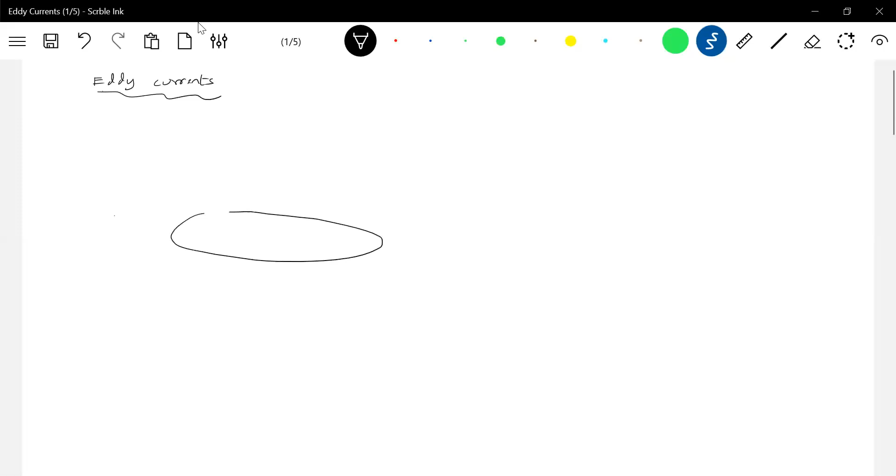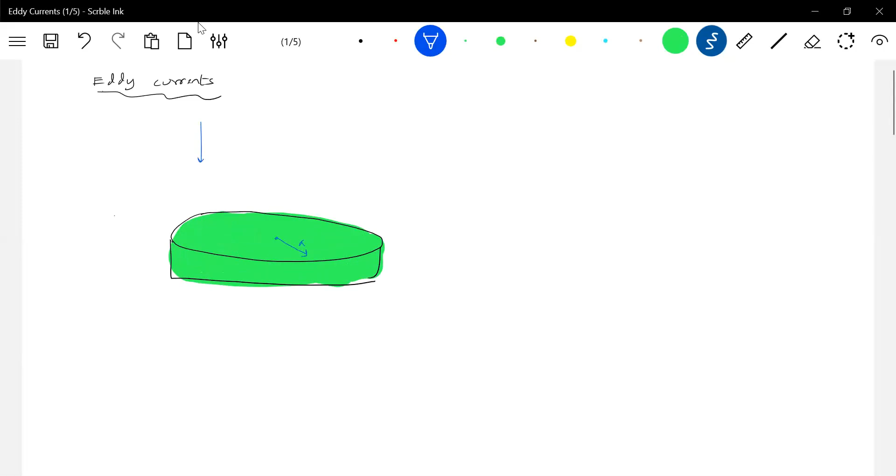So let there be a conducting ring, a conducting solid disk having radius r. Here I'll make B bar directed into the plane of this conducting disk. Let this B bar vary with time. This is an iron disk, let me call it. Now, what conditions will arise here?

Can you remember the previous problem? I asked you about the power dissipation, and there I asked you to neglect eddy current, but here you have to take eddy currents into account. What is basically a conductor? It contains electrons, free electrons, and the free electrons can move randomly in any direction.

And what about ions? Ions are immobile in a conductor. They'll be bound by bonds, and due to adjacent bonds, the ions will not at all move, but they can vibrate about their mean position. But electrons, they can move randomly. Now there's a magnetic field there.

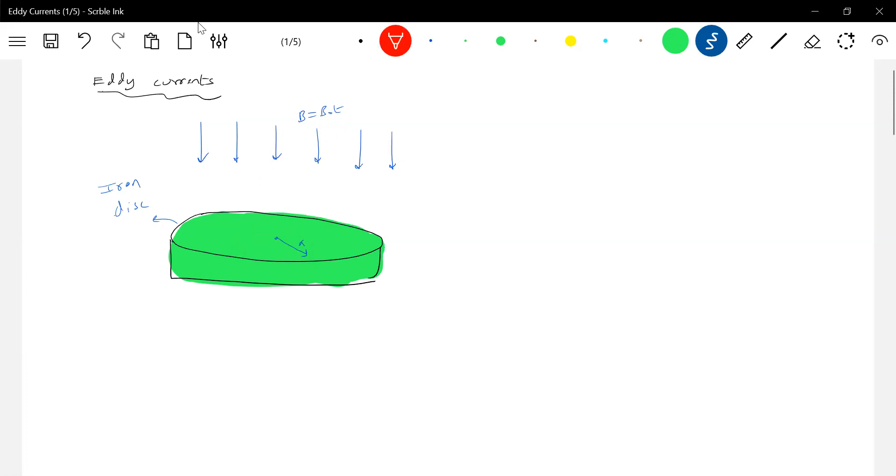The electrons which are moving randomly will experience this magnetic field, that too a time varying magnetic field. Due to this time varying magnetic field, the electrons will encounter an induced electric field. Due to that induced electric field, the electrons start moving. Now how do the electrons move? Will they have an ordered motion? The answer is no. What we notice is that these electrons will try to complete a closed path.

In this way, what happens is the free electrons which are present will complete a loop like this. They'll move in this direction, meaning the electron will be moving like this.

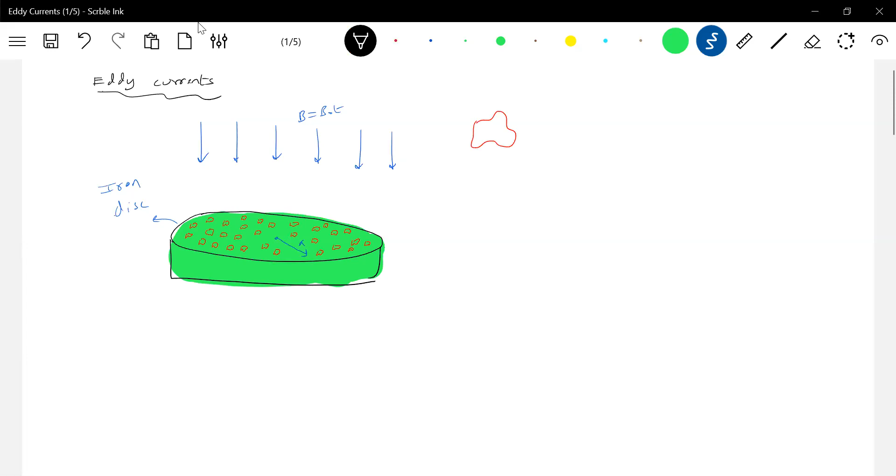Why am I putting this? This is the path of the electron. Okay, I had to show it opposite, no? The induced current will be path of free electron. Path of free electrons in the disk.

So why do they move like this? Because it will not be like in a circular ring, they don't flow in one specific path here, it's very random. Like this, an individual electron will try to move in a circular path. What makes it move like this? The induced electric field. We know if the magnetic field varies, there will be an induced electric field produced.

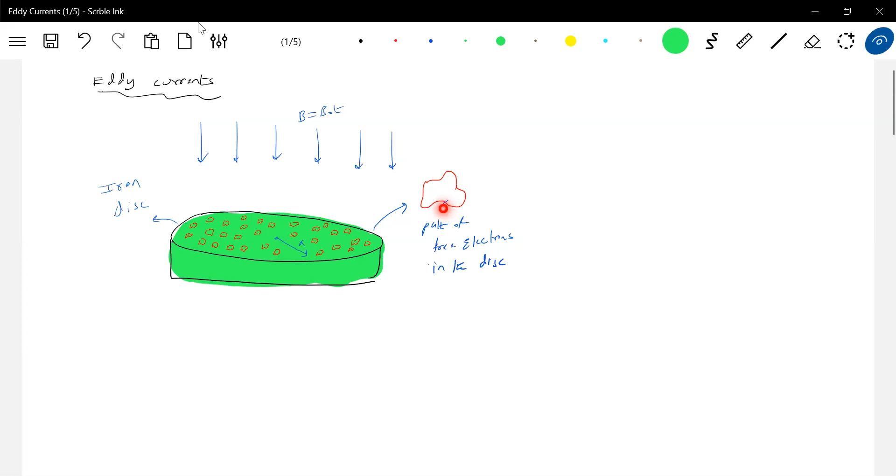Due to that induced electric field, these electrons will experience force. E bar - this is the path of free electrons, and the current will be in this direction. Let me just put only this much. What is this arrow? The arrow indicates the path of free electrons in the disk.

Why do I do this? Because you go back and account for Lenz's law - the flux is negative, negative flux increases, d phi by dt is negative, EMF induced is positive. So the induced current should flow counterclockwise, opposite to the direction of induced current there should be electron flow. So what I'm showing is the path of free electrons. These are called eddy currents.

It's very difficult to predict any equations for this. Now, whenever an electron moves in some path, what will happen? It will encounter collisions with the ions, and thereby heat will be generated. They'll be drifting in this random path, better to say - rather than movement, these electrons will be drifting in this random circular path.

Like that, an individual electron will try to move in this way. There will be millions of electrons, so what you should see now is millions of these closed paths. Will there be any heat generated? Yes, there should be heat generated. If you go and touch this, it will be hot.

The temperature of this will continuously increase. Where has it come from? The work you do to produce a variable magnetic field - that energy is utilized to make these electrons move in a curved path. And due to the flow of electrons inside a conductor in some random path, heat will be generated.

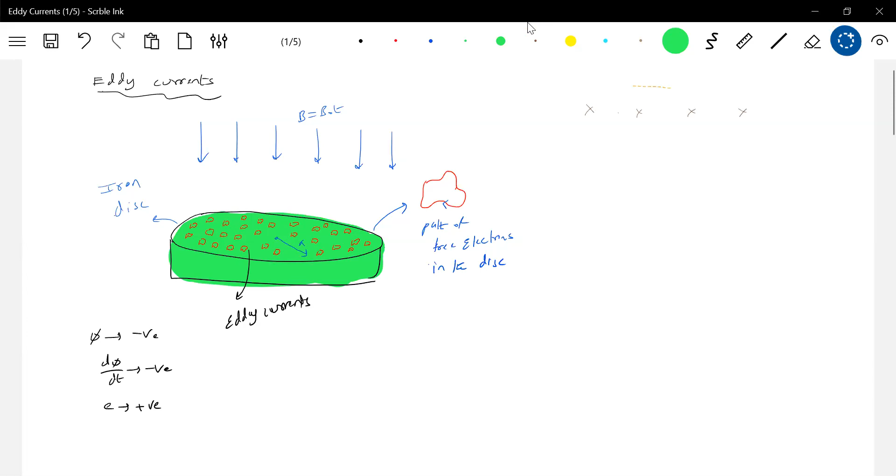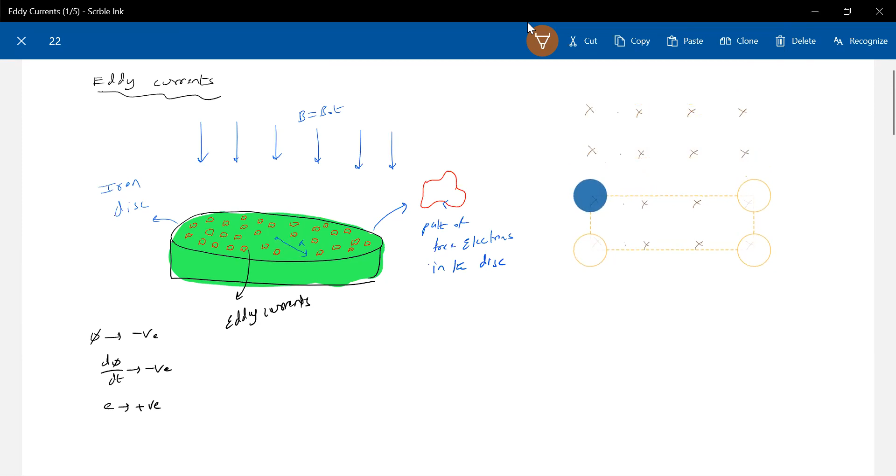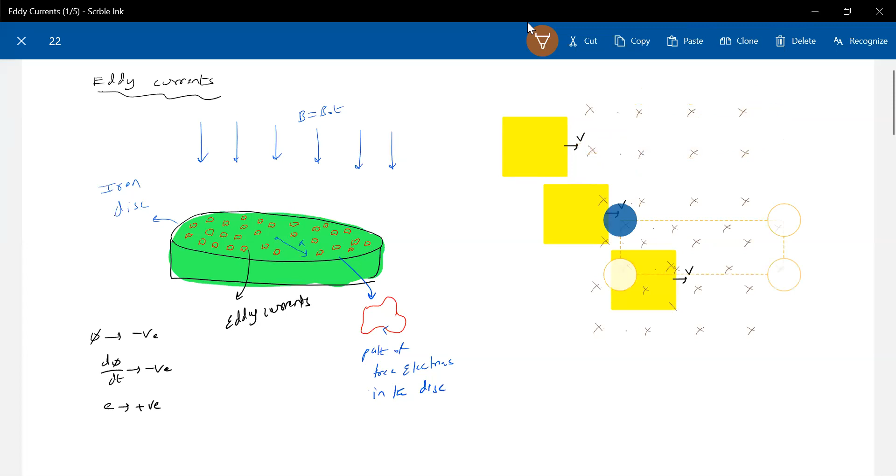If I have a magnetic field, now let me take a plate. There's a plate. I'll start making it move. Now the same plate is going to enter. Now it is entering. I need more dots. This plate now is fully inside.

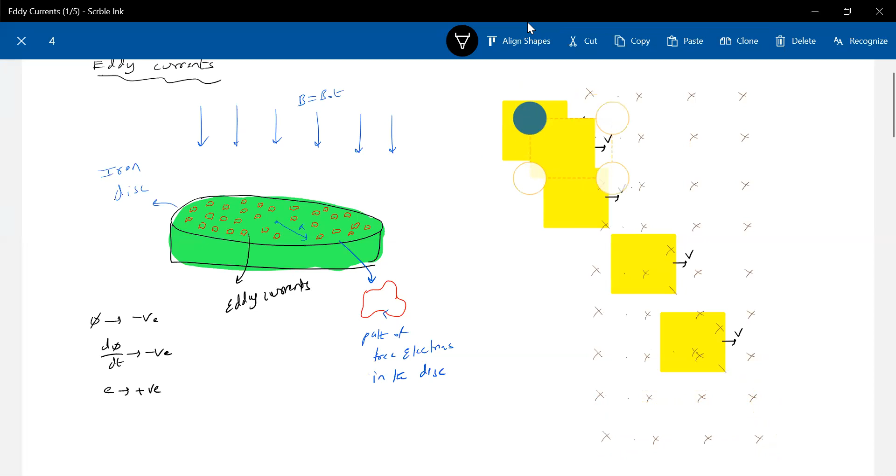Okay, this is the situation I brought. We'll analyze this. What is this yellow color? It's a metallic plate, I'll write it as copper plate. There is a magnetic field present. This plate starts entering into the magnetic field.

Now it is entering. Now let me check if anything will happen to its velocity. Now let's come to Faraday's law. The direction of induced current is such that it should oppose its own cause. Now, in what direction should the induced current flow?

In what direction should that induced current flow here? If it were a loop, we would have answered, but this is some conducting plate, so where is the question of any specific direction? At least let's use Lenz's law.

Flux from the magnetic field linking this is into the plane. So as it enters, the negative flux increases, d phi by dt is negative, EMF induced is positive. So therefore the induced current should be anticlockwise. Where do I show that induced current? Can I draw it here, on the edges? No, an eddy current will flow here, then the eddy current starts flowing. Where? Only in this region.

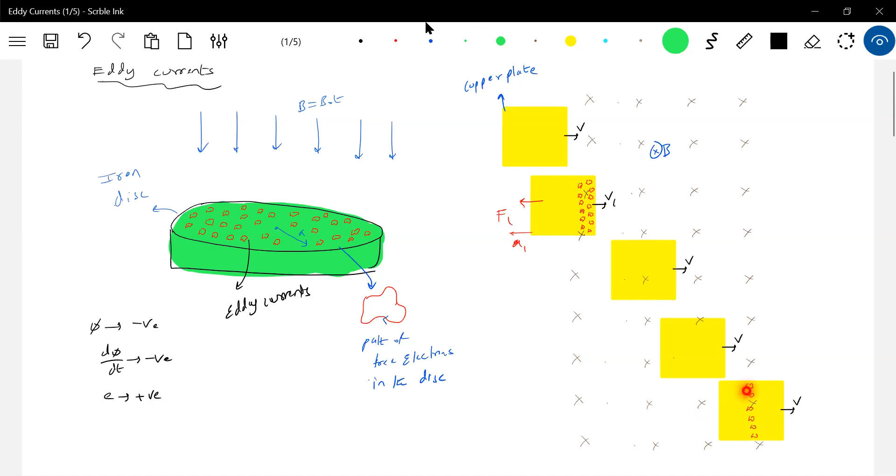Now again, the direction of induced current is such that... finally it has entered into the magnetic field region with a velocity, say V dash. Okay, it will remain V dash. Now again the velocity will change, again decrease. So the direction of induced current is such that it should oppose the cause - again retardation. Finally, this plate will move through the magnetic field with a constant velocity.

Now here is where eddy current will come - you have to know you should not show eddy current here, but where the flux linking varies. The moment the plate point starts moving out, there was flux, now the flux has become zero. So suddenly there will be an induced current by Lenz's law, and an eddy current will flow. So you should not show current here in this way - this will be wrong.

Able to make it out? This eddy current, they'll exert a force. Can we calculate this? Not possible. Of course, we have equations, but at our level, not possible to predict anything like a force. They may make a problem: the eddy current will exert a force of say 10 Newton. If you increase speed, then this force will increase.

The eddy currents will come only when there's a time varying field, not like something else. Only a time varying field will produce electric field, will produce eddy currents. So when a loop enters a magnetic field or when it's leaving the magnetic field, or when a conducting plate is entering or leaving the magnetic field, eddy currents will come.

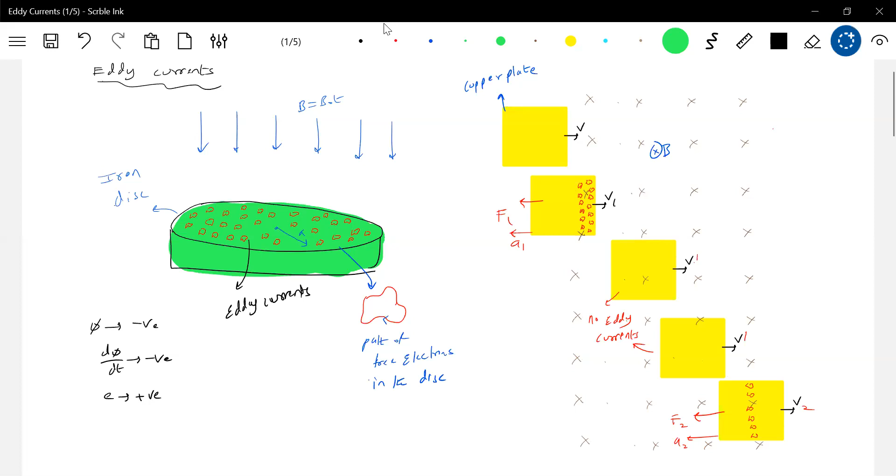Where are eddy currents produced? Let's give an explanation. Hope you're getting this. It's a very small theoretical idea, but it's having wide applications. I'll explain the applications also. You'll be surprised what is the use of basic science and the engineering applications, how good they are for society. I'll give examples at the end of this.

Now, eddy currents are generated in the plate when the plate is entering or leaving the magnetic field region. Then in the plate, where will they be? Only at the boundary. Eddy currents are not at all over the plate, only a part of the plate which is at the boundary, only there eddy currents are produced. No eddy currents are present elsewhere.

I'll pull it up. Eddy currents are present in a plate where a part of the plate is, where a region of the plate is at the interface or at the boundary. What is a boundary? This is a boundary, this part is a boundary. Where a region of the plate is at the boundary of the magnetic field - this part is very important.

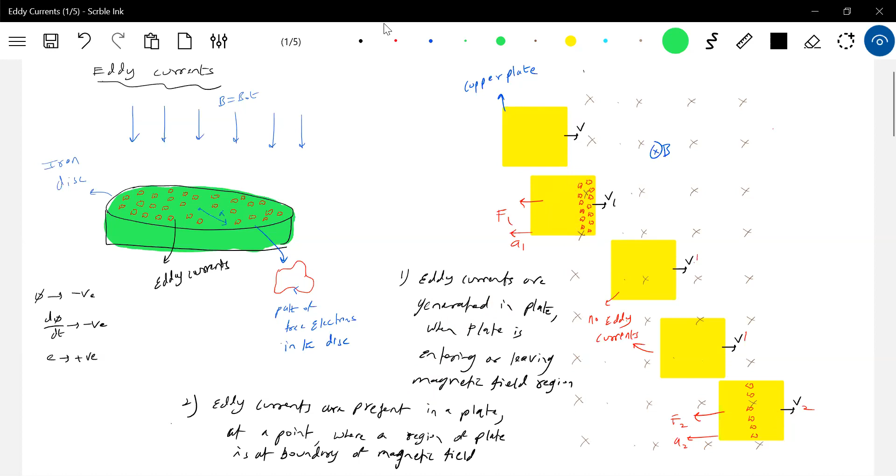In the whole plate, are eddy currents there? No, only a part of the region of the plate which is at the boundary of the magnetic field - there only the eddy currents are produced. I think these are the two very important points which I'm trying to stress here. This eddy current, what do they do? They will retard, that's all. Due to eddy current, the plate will undergo retarding motion. One more last point: due to eddy currents, the plate undergoes retarding motion. These are the three primary things I studied. Anybody having doubt, you can clarify.

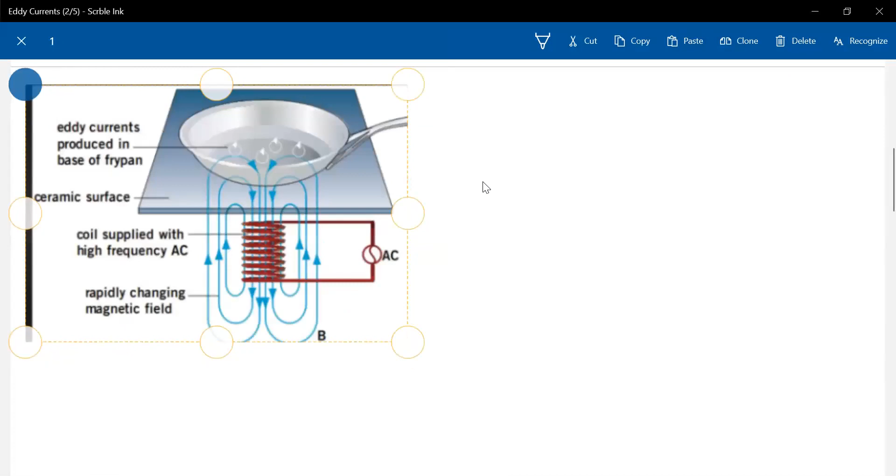Okay, now let's take this one. So when I was studying, I think this was like a dream come true, something like that. Now we have in our home the induction stove. Hope everyone has seen an induction stove - usually it's black color, no? All of you have seen an induction stove? This will be more safe, no? It is like even if you put your arm there... Induction stove - the induction stove is nothing but the application of eddy current.

Nothing big will be there. So what we do is, we have a ceramic surface, this one, and the base of the frying pan. So then what they ask is like an induction cooker - the bottom part is very important. I'll draw the free body diagram, it'll be easy for you. This is the bottom part of the pan. Let's bring all the structures. This is a ceramic layer. Here I'll bring a solenoid.

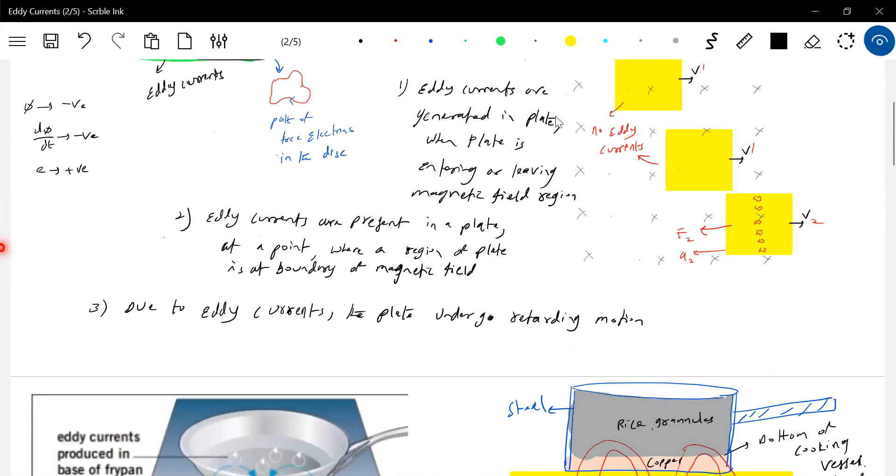How do eddy currents work? Use some brain. There's a bottom, at the bottom what happens there - eddy current will flow. So we are not bothered about how each electron will flow. Is it of any use?

You want to cook rice and you want to eat rice, so will you bother about anything here? Only it should be generated, that's all. At the bottom, eddy currents will flow there, so due to the flow of eddy currents, heat will be generated. Eddy currents - you can't predict the path of each individual electron, that's all, but the eddy currents will flow like this.

I think this is one of the beautiful innovations we can feel from eddy current. To be frank, when I was studying, we didn't have this induction cooker thing.

I think slowly people are accepting it. People think you'll get a shock - why would you get a shock? You tell me, where is the question of shock? Nothing is there. Even if something spills out, nothing will happen. It's ceramic, and it will permit the magnetic lines, that's it. So where is the shock? I think this will be covered inside the cooker, inside that stove, totally covered, and that will take less space.

I think you should do one thing - those who are not aware of this, just watch induction cooker on the internet. So many things are there, and it is more efficient.

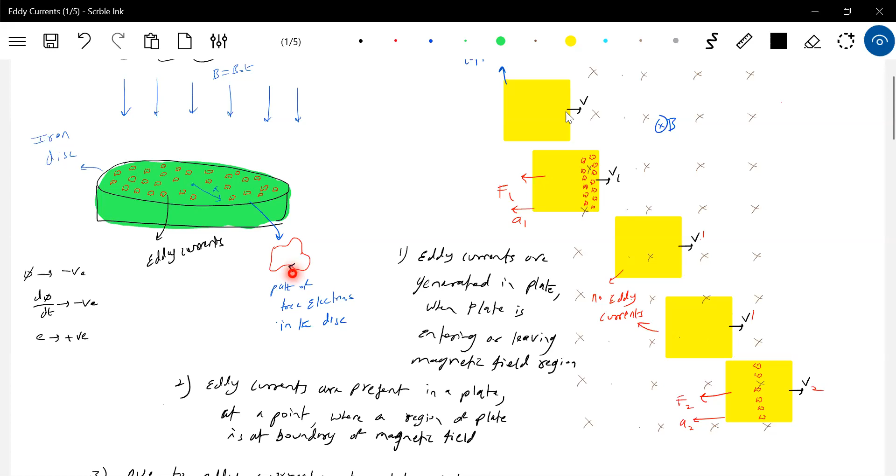But by Lenz's law, the same thing applies here. You mean to say eddy currents are here, not somewhere else or in air. That's why you wanted to show that one. So what is this? It's based on the Lenz law convention. So here, if you want, I can show it here. Okay yes, this one. Understood, yeah.

And now something like this, a conducting disk. I'll give it angular velocity omega naught and release it. What can happen to this angular velocity? This is the axis of rotation. Then a magnetic field is present here. I'll give it angular velocity. Will anything happen to this conducting disk? Can you say anything about what can happen to its angular velocity?

So this magnetic field is there, which will produce a magnetic field. Now look at this one. This part of the structure has no magnetic field. The moment it enters here, it will encounter the magnetic field. So suddenly flux is non-zero, so flux linking that region is varying, so eddy currents will be produced. As flux linkage changes, according to Faraday, EMF will be induced.

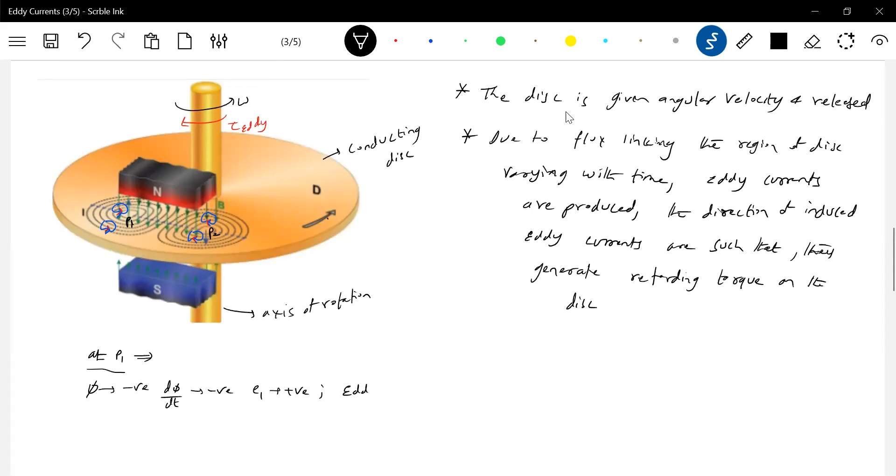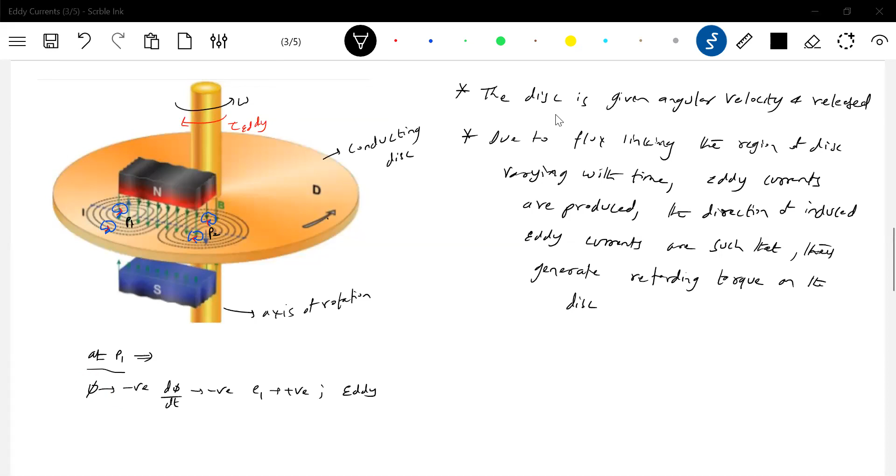At point P1, flux is negative, d phi by dt negative, EMF induced positive. So eddy currents flow... zooming, what all we write. Okay, I think, yeah, now clear. Is it visible?

Okay, I think this is the maximum possible. Now you can see these eddy currents flow in counterclockwise direction.

Now, flux negative at P2, sorry, at P2, flux negative, d phi by dt positive, EMF induced negative. So eddy current flows in clockwise loops.

So they may ask you questions of this kind, you should be very careful. Not a mere diagram, in the diagram they will ask you to analyze and find the direction of induced eddy currents. Again, the same Lenz law. Hope everyone is able to understand how to predict the direction of eddy currents. It should be due to Lenz's law.

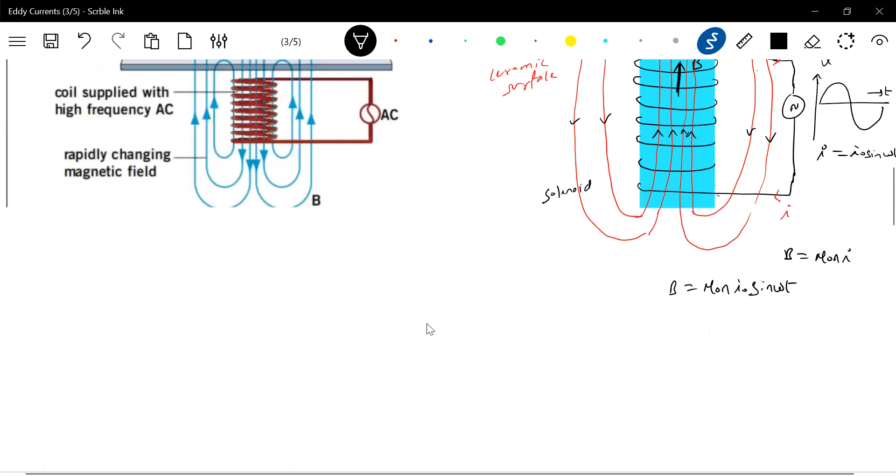Now one more application. You must be ready to predict the direction of induced current, this is very important, the eddy currents direction. Here also, let me go back, I'll show at least one. So what do you expect the direction of eddy current here? Like this, at least one I'll show.

Okay, agreed, this one. No, one more application. Suppose if you send a... let me have water.

In some applications, suppose an induction stove, we need the eddy currents concept. In some applications, the eddy currents are a big headache and they have to be overcome. So how to minimize those effects of eddy current, that we are going to see.

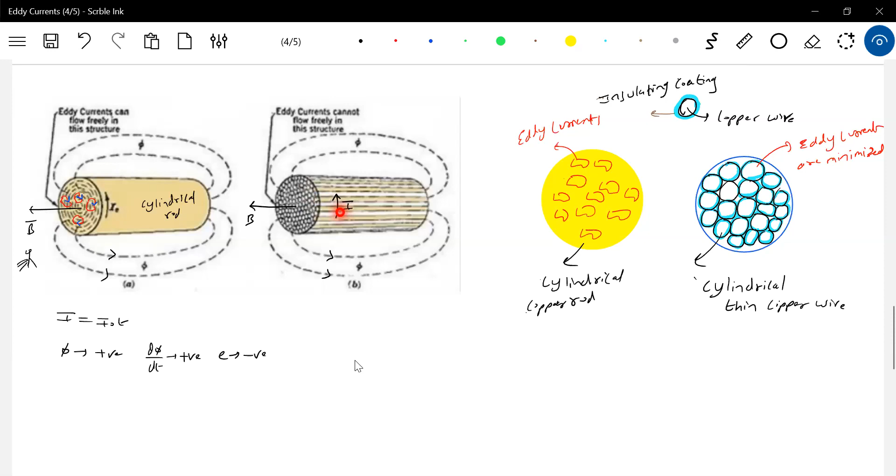No, it can be like this even for a rod. Suppose instead of this, if I have a rod, it is possible, but what is the thickness of wire? Use some common sense, look at the diagram. Thickness of wire is so small that the eddy current, even in this wire, will flow, but that will be minimum.

Not making observation of diagrams. You see, so thin they have shown.

No, it is like this. So here there's a structure where the magnetic field is linking it. The magnetic field is directed in such a way that it will be into the plane. Now, because of this, there will be eddy currents here.

I think now use some common sense. Now, instead of the same structure, if I make it with... I'll stack thin plates one upon the other. Can I bring this? Can I produce this rod of this shape?

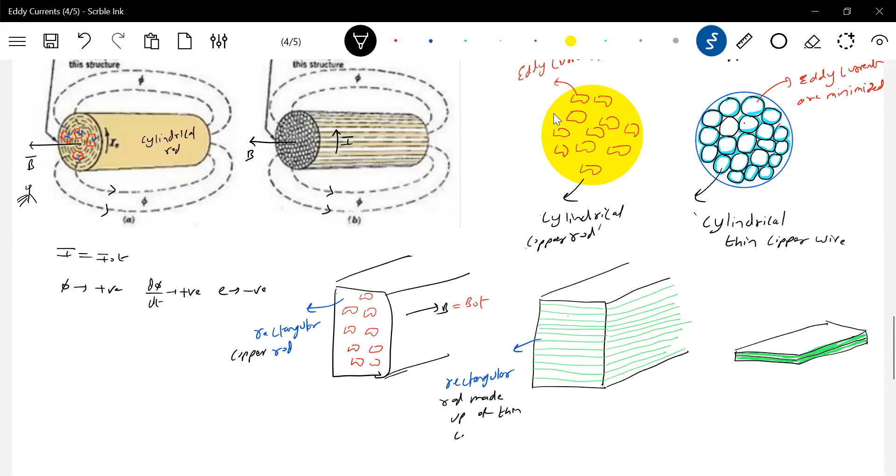Okay, this is what you have to think here: this is the copper rectangular copper rod. What is this? A rectangular rod made up of thin copper sheets. Then there's copper - the green color is an insulator.

So we are not permitting - the eddy currents are not permitted to complete the loop. We are minimizing it, we are minimizing it.

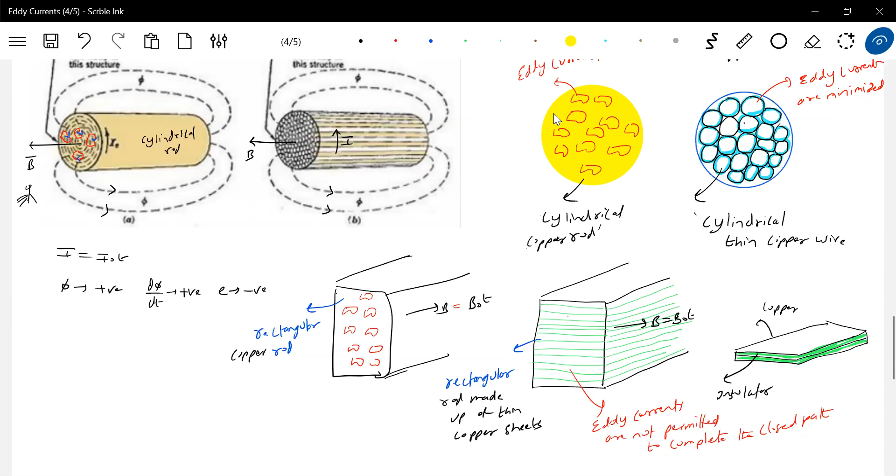So like this, in the applications we need, though the magnetic field is varying, still there's no eddy current - eddy currents are minimized here. Okay, depending upon the application, you can see here. Like this, we have plenty of applications - at some applications, at any cost, I should minimize eddy current. In some applications, I need eddy currents. Please do understand, so these are several methods we have brought.

Okay, let's go for a few more examples. Now, same thing - the plate, there's a uniform magnetic field there, and I want to minimize the...

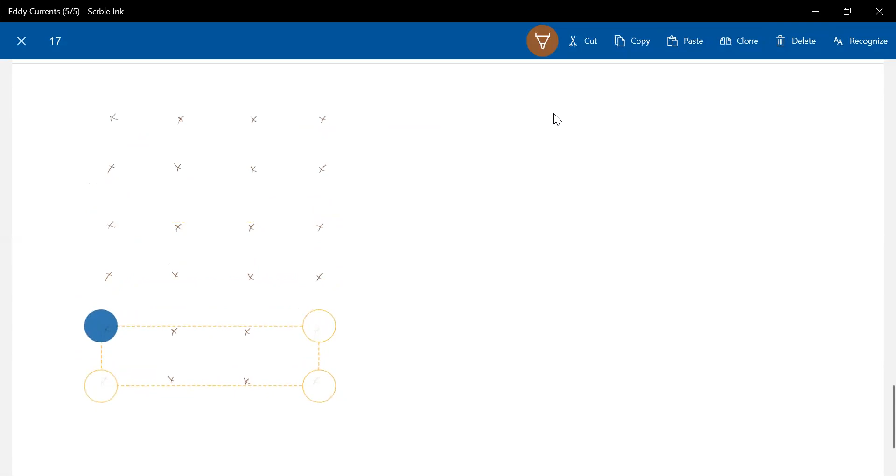No, this is the plate I'm bringing.

Like a comb, all of you know, metal comb, let's assume that one. And there's a uniform magnetic field there, B is uniform, directed into the plane. Now this particular sheet is like an iron sheet.

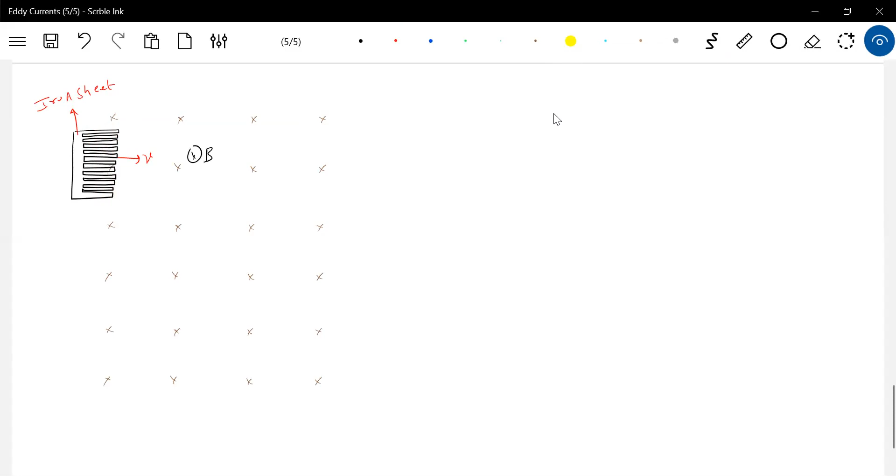I'll slice it up like this. Now I'm going to move it. Okay, now can you... I will just color it so that you can notice that.

You can exactly notice that we have removed some sections of iron there.

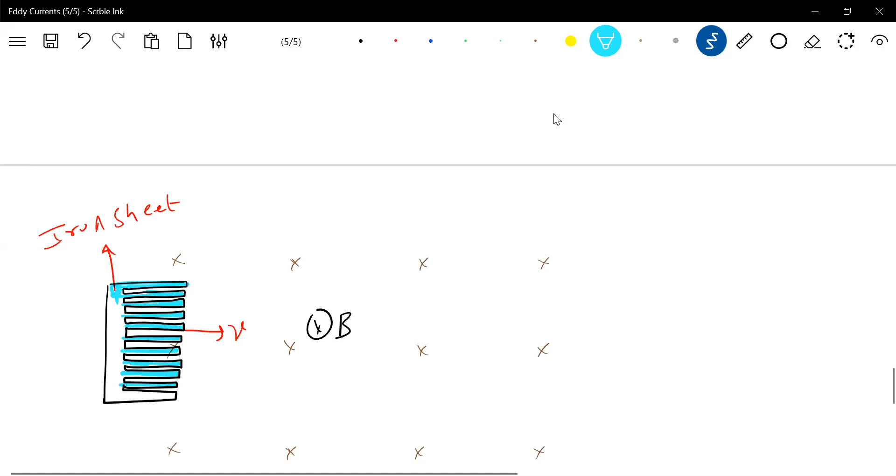Oh no, comb - I think the best thing is a metal comb. Now, what is this? It's like a metal comb. If I move this metal comb in this magnetic field, then we have an iron plate, and the same thing. Let me bring another iron plate. Let's see in both cases, what about the eddy current?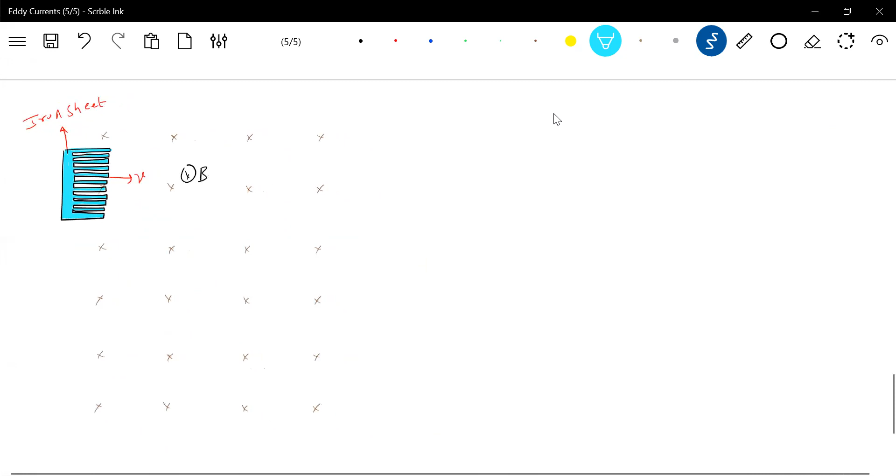Yeah, we have - let's go to our diagram. Now eddy currents will flow, but it'll be less compared to the previous one. So here, the same metal plate, I'll bring it.

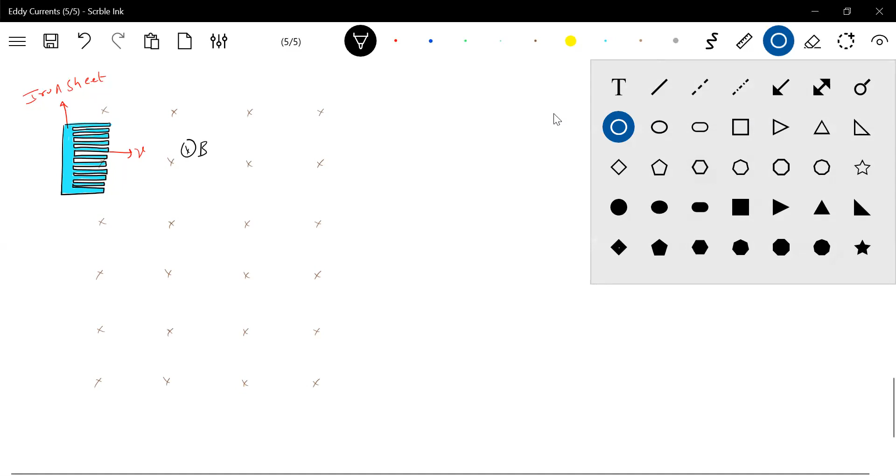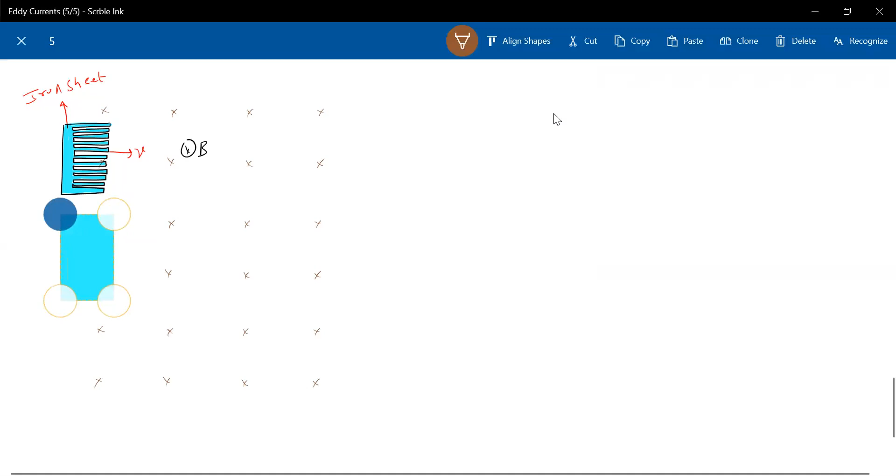I brought a similar metal plate here. There's plate 1 and plate 2, both given velocity. In which case will there be eddy currents? Where will the eddy current be in this region?

Will eddy currents flow in all regions? No, only the region where the magnetic field is at the interface will have it. But there's also an iron sheet here—why are there no eddy currents? Because we are not permitting them to complete the closed path.

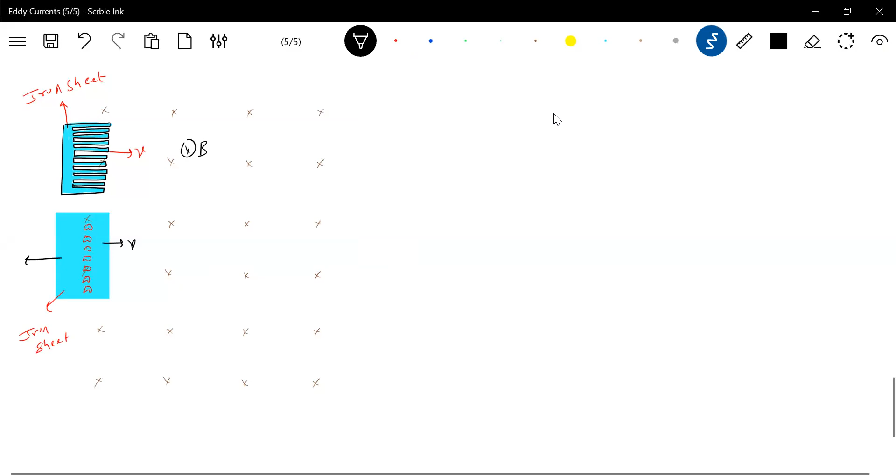Similar to a comb—if you haven't seen one, go home and make the observation. But tell me, in which case will the retarding force be more? Here, no, in the second case the retarding force will be more. Here the retarding force will be less.

F1 will be less than F2. The reason is less eddy current will flow here, while here the eddy current flowing is maximum. Eddy current will flow in this small region but it will be negligible, since we've minimized it by almost 90% by slicing this particular plate.

So in some applications, I should minimize eddy current. I've shown several examples of this. Here too, a plate moving through a magnetic field—where it enters the magnetic field, the eddy current effect should be minimized, so I'll slice it.

Iron sheet 1, iron sheet 2—similarly when it is leaving, the same condition applies. So where eddy currents are needed, I'll try my maximum level to produce them. Where eddy currents are to be minimized, I'll try my maximum level to minimize them.

Hope everyone is able to understand—I think this is a very good, versatile theoretical concept. You won't get numericals, but examples may come involving rotating or translating scenarios.

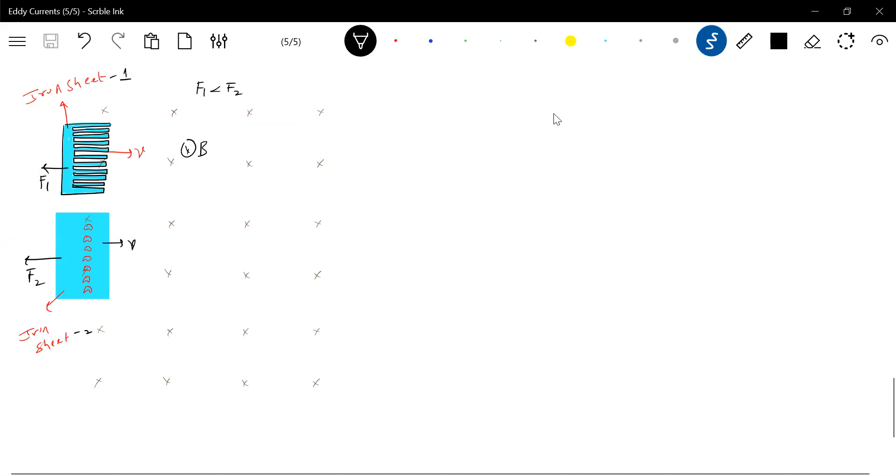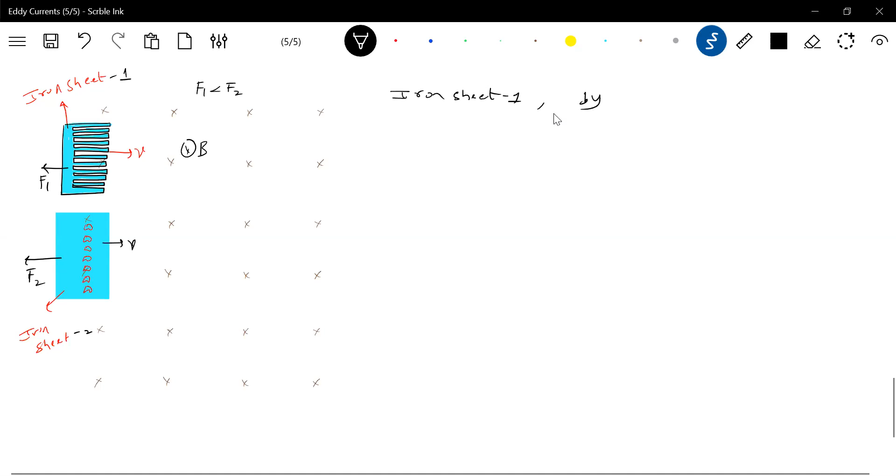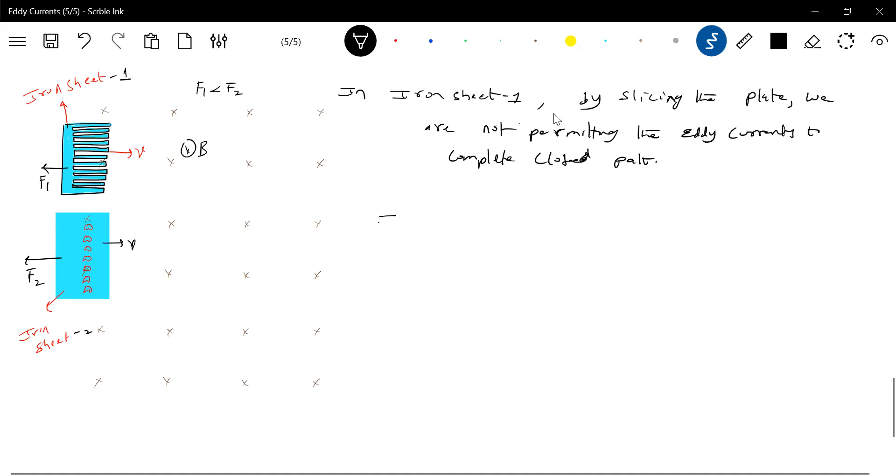So in iron sheet 1, what we do is slice the plate so we are not permitting the eddy currents to complete a closed path. This way, eddy currents are minimized.

Hence, less retarding force where slicing is done. Where eddy currents are free to flow, hence more retarding force. But eddy currents will only flow in the region at the interface, not everywhere.

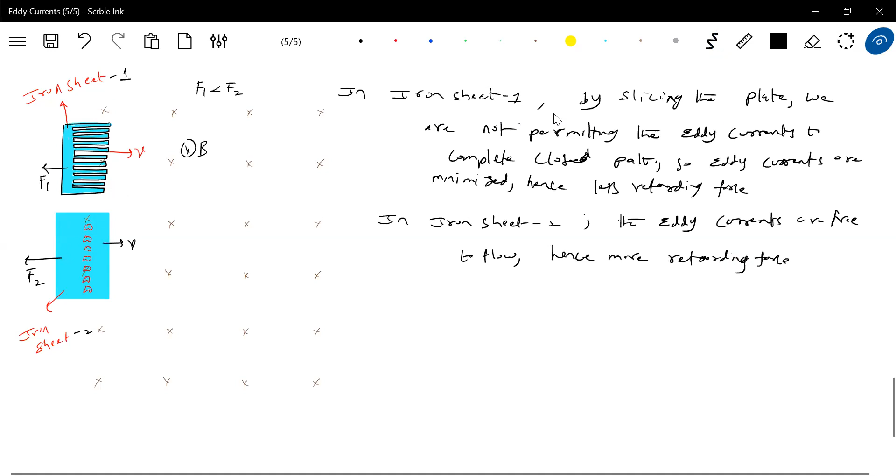You may encounter confusion here, so let me note this down. I'll conclude this point and then we'll try a few more applications.

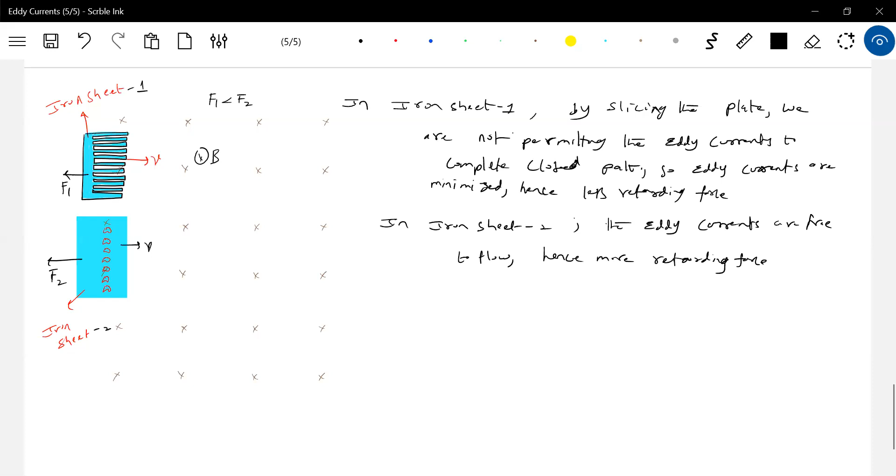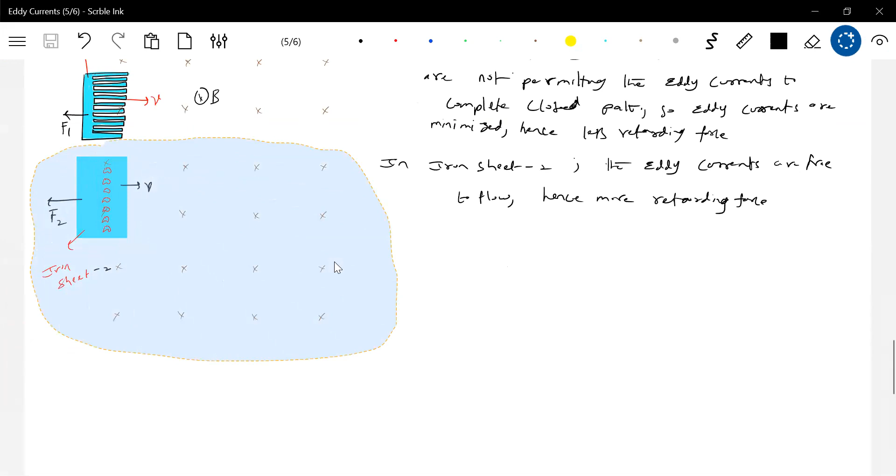I think it's the same set of diagrams, and some of you are getting confused, so let's take this example.

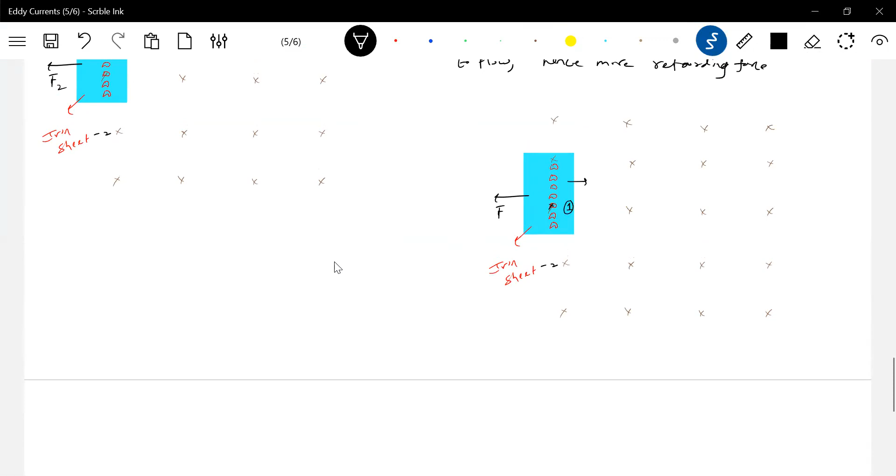There's a magnetic field region where eddy currents form—the primary thing is numbering the plate as 1, 2, 3. Where will eddy currents be—at 1, 2, or 3? Region 1 is already inside the magnetic field. What about 3? It lies outside the magnetic field. What about 2? It is at the interface. So at region 2 there will be eddy current, not at 1 or 3.

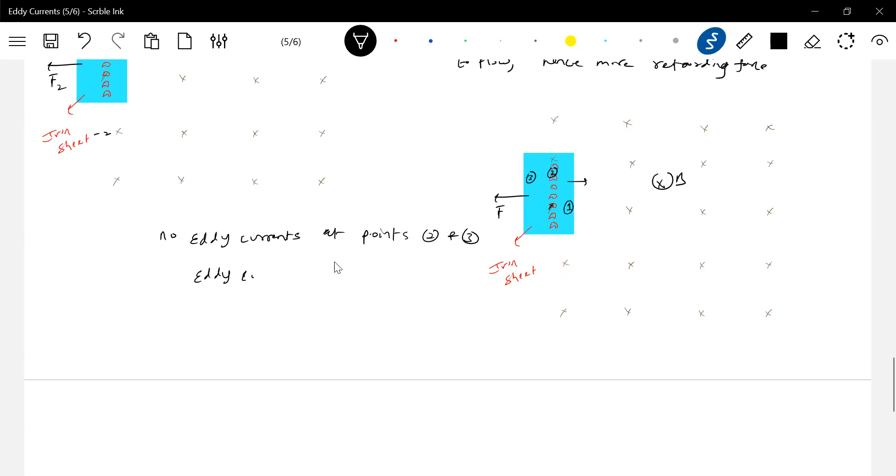No eddy currents at points 1 and 3. Eddy currents flow only at the regional interface—I think this is again very important. Not throughout the plate, only the region where the magnetic field suddenly either increases or decreases—only there will the eddy current flow.

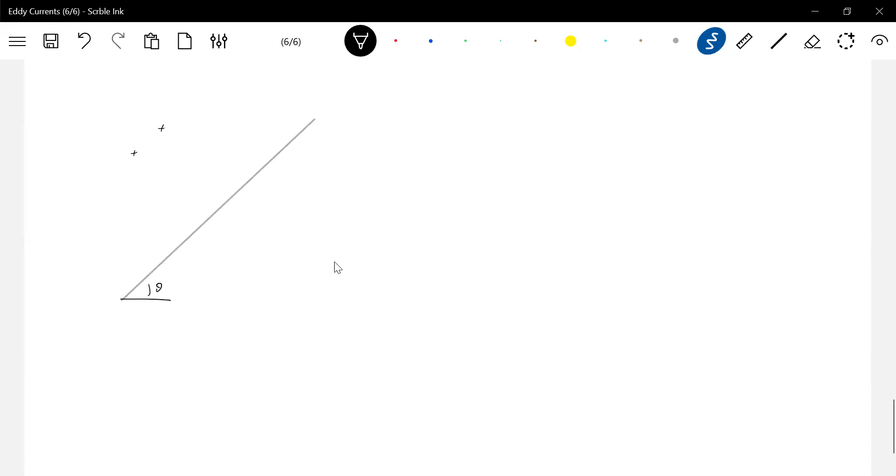Now several examples can be asked of you, so you have to be very careful here. This is the inclined plane, then there is a magnetic field region, then I will release a plate—or a block—and ask what will happen.

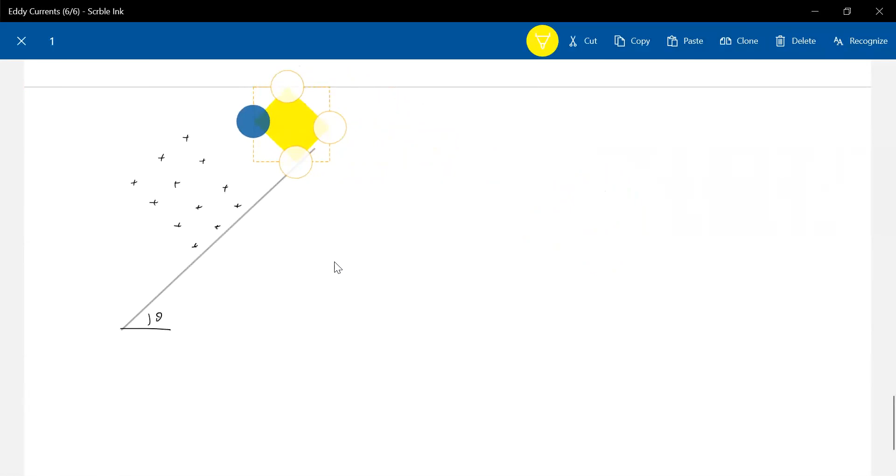What will be its acceleration when it is passing through this magnetic field region? It's a conducting block—an iron block, I'll write it. There's gravity present, and there's a magnetic field region.

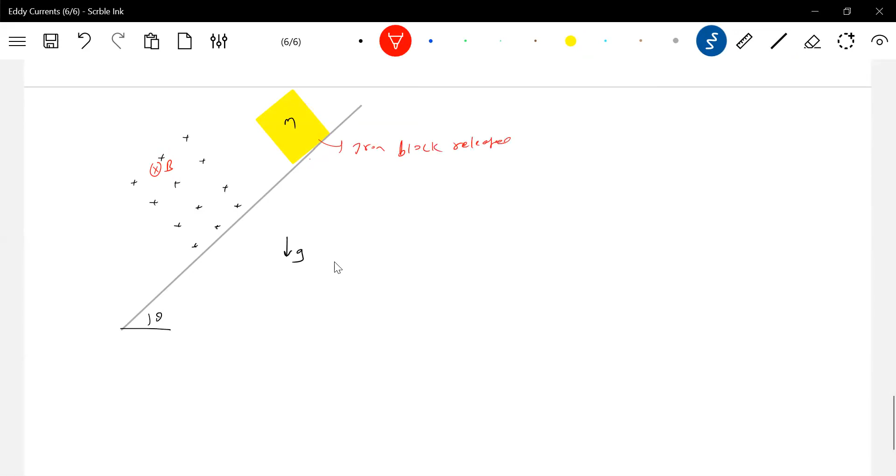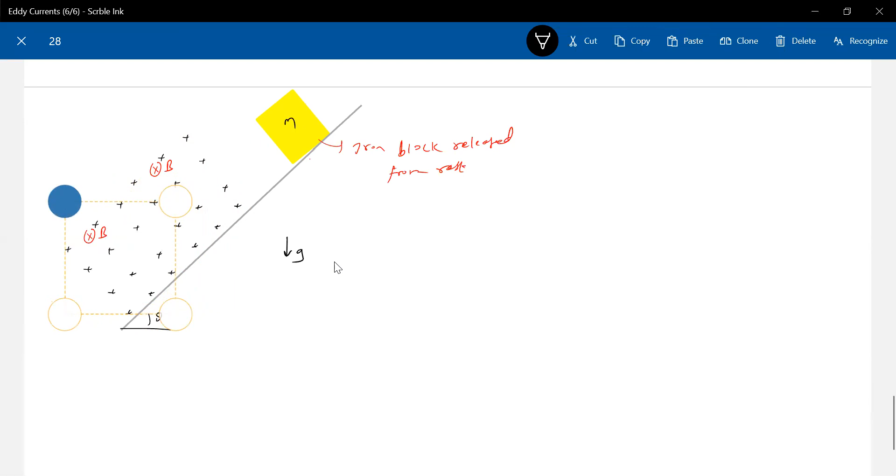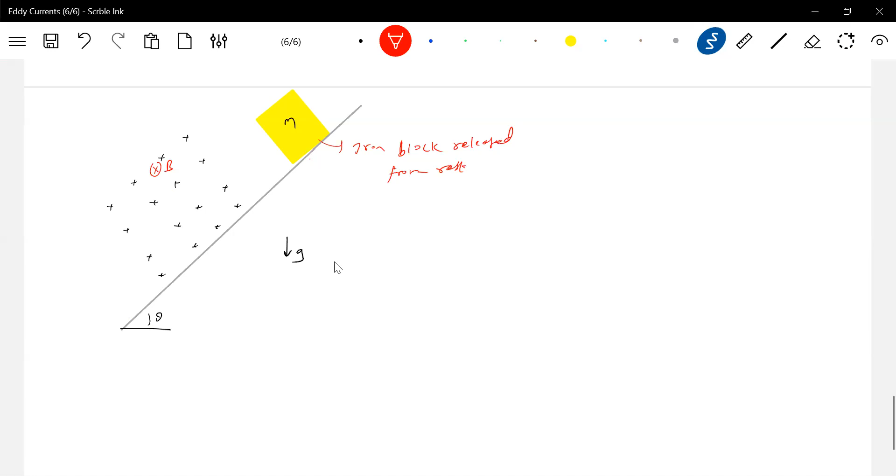Let's complete it now. What will be the acceleration when it is entering and leaving? Very tricky questions related to mechanics can also be brought up.

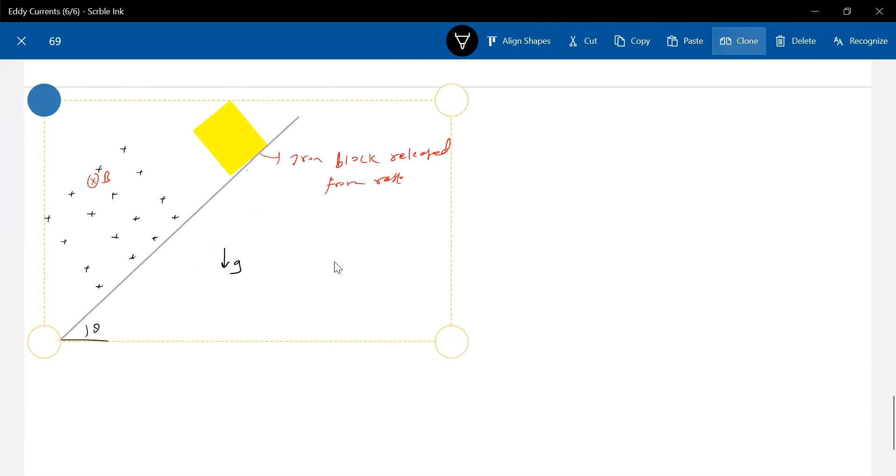Let's go for when it is entering. What will happen? An inward action, mg sin theta, will act in this direction. Then will there be any eddy current as a retarding force? F_eddy, I'll write it. So definitely it will have acceleration, but this acceleration will be less than g sin theta.

Again, when the block is leaving the magnetic field, again there'll be an eddy current, a force due to eddy current. What will be the acceleration?

Okay, let's come to when it is entering. The direction of induced current is such that it should oppose the cause. What is the cause? It is entering, so it will oppose here. Now it is leaving—again, the direction of induced current is such that it should oppose the cause. It is leaving, meaning it should oppose upward only, so the eddy current force will again be upward.

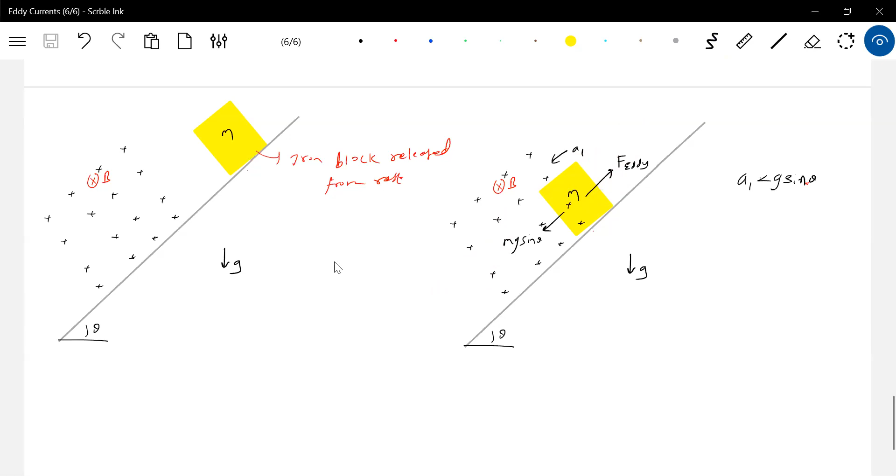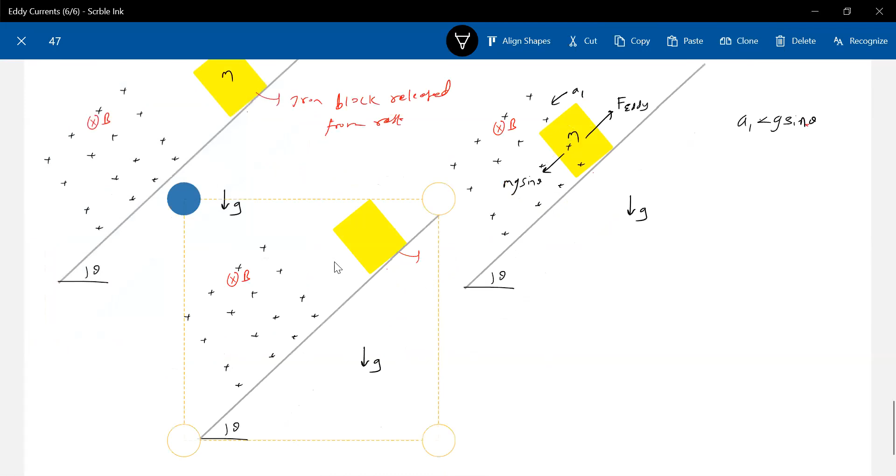This is more troublesome because we don't have any big, neat formulas to justify all these things. A student must use basic knowledge to justify all these answers when it is leaving.

So mg sin theta acts down the incline, and again the eddy current force acts up the incline. What is the acceleration, A2? Again, this A2 will be less than g sin theta.

Just be careful, anything of this kind will be asked for you. Check the mains paper and advanced paper - they give just mere theoretical information, but they prefer equal weightage between induced electric field and eddy current. Both are given equal priority.

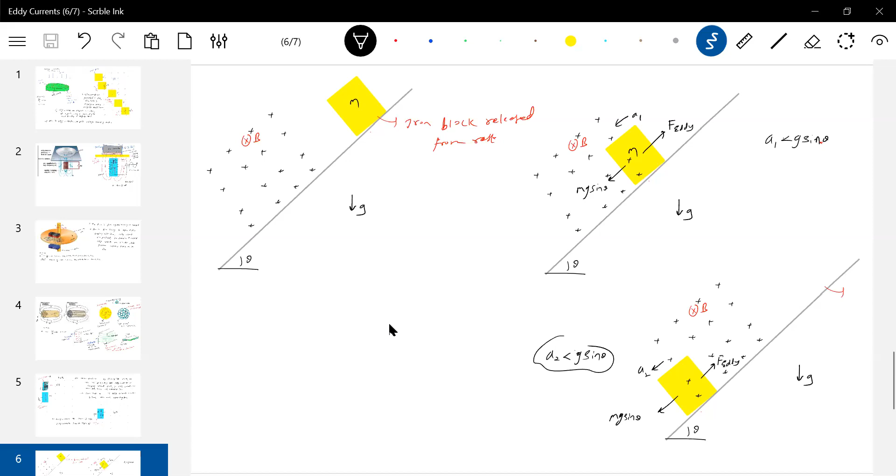Now let's see - I have a magnetic field region, okay, one more question. Let me discuss this.

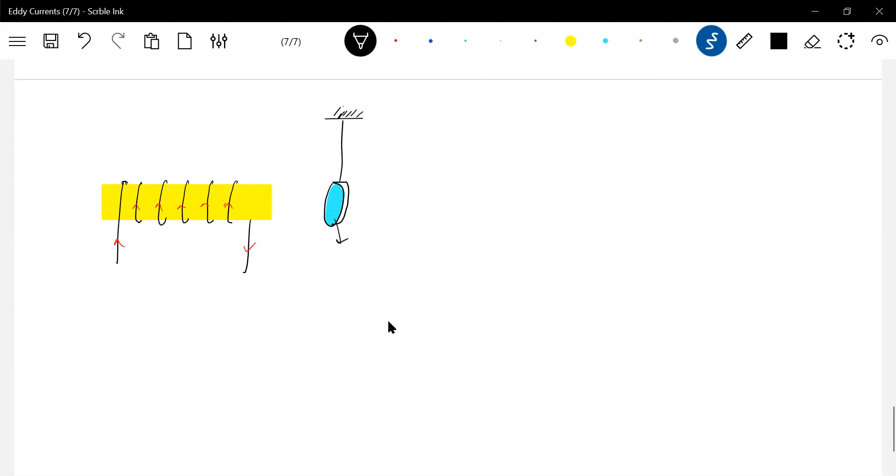This is a solenoid. I'll send a current I. Now here is a conducting disk, and it is suspended just nearby, placed at the mouth of the solenoid. I think you have to really get this one - so there's an iron disc. The resistance of the disk will be very small. So I'm going to send a varying current - I'll switch on the current where the current is I naught T.

Now what will happen to the disk? So when current flows to the solenoid - or I'll bring a switch, it'll be much easier - such that this current is a varying current. So I'm going to close the switch. When I close the switch, a varying current will flow. Then just after closing the switch, what will happen to the disk?

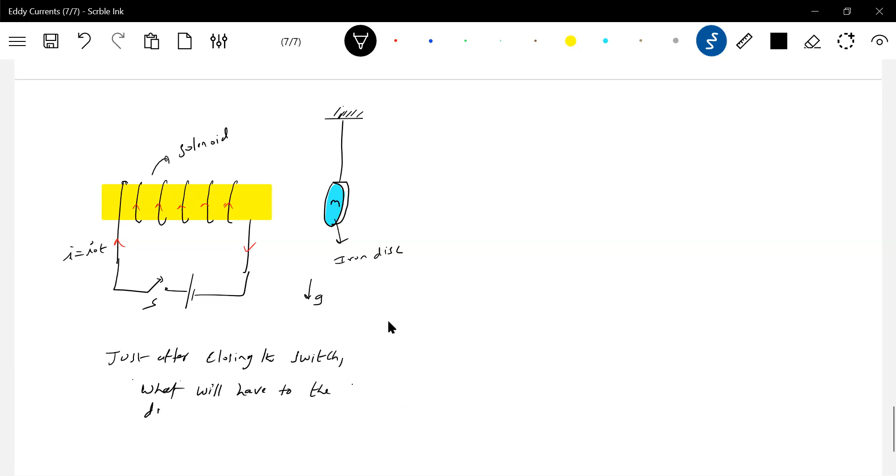Gravity is present, this has a mass m. This will have a small resistance. This is a solenoid. Just after closing the switch, what will happen to the disk's movement? What will happen to the disk's movement?

I want an answer from your side. Will the disk move towards the solenoid, away from the solenoid, will the disk rotate, or will the disk remain still?

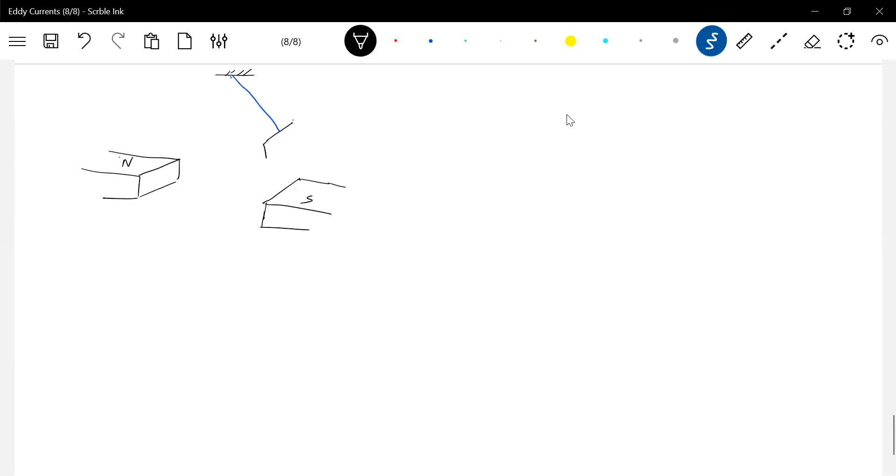This is a north pole. Okay, these are the bar magnets. Here I do have a string. And there's a metal plate. I'm going to release this metal plate, and it's going to swing between the poles.

I think a 3D diagram isn't possible because we have to show 2 bar magnets. Okay, I'll go for a plane diagram instead. In the plane diagram, the magnetic field region is shown, and there's a plate suspended.

The magnetic field region is this one, and we need to release it.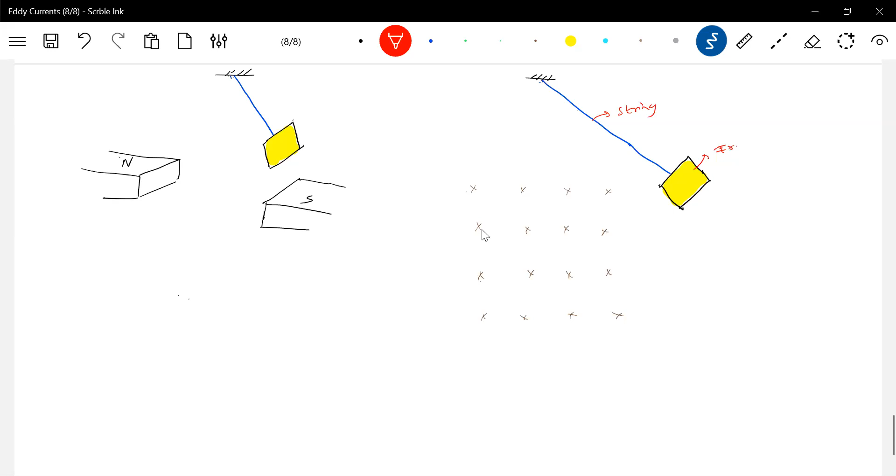Now, as this plate enters and swings, what will happen to the plate? What type of oscillations is it going to describe? I'll release it from this portion, so it starts swinging like this.

So the moment it enters here, eddy current will flow. The eddy current will oppose it with a retarding torque, and because of that, the angular velocity decreases. Then again, when it's leaving, retarding torque acts again. So altogether, what are the oscillations of this plate? Damped oscillations - it's going to describe damped oscillations here.

Here, the plate will come in such a way that it will move normal to the magnetic field. There are 2 ways I can make this plate move - here is the diagram. The plate will come in such a way that it will cut the lines of force. The lines of force are into the plane. The plate will enter, and when it is entering, this part will see - I think we can draw a straight line. It looks good. Now, when it is entering, we'll see the situation.

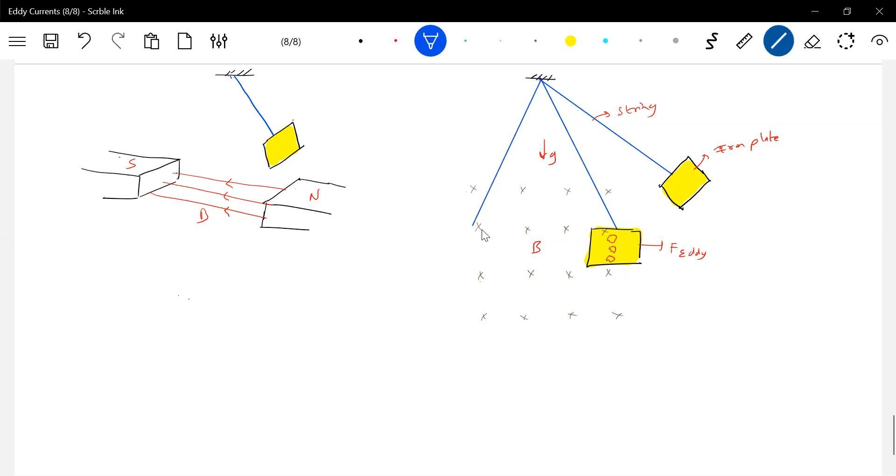So again, the same plate, when it is leaving here, will there be any return? It will have velocity in this direction - don't show horizontal, let's call it v1. So again here it will have velocity perpendicular to that string, v2. So the eddy current should act here in this direction, and this eddy current will oppose this motion. So what do we expect? The oscillation of this plate is going to describe damped oscillations.

The plate is the iron plate, and it will describe... now, if you slice it, making it like a comb, then the damping effect will be minimized. Are you getting it? Like a comb - if you slice it here, then here also you slice it. Now it will describe oscillations, but it will become underdamped. Can you remember the types of damped oscillations? We have undamped, damped, overdamped, critically damped, and underdamped.

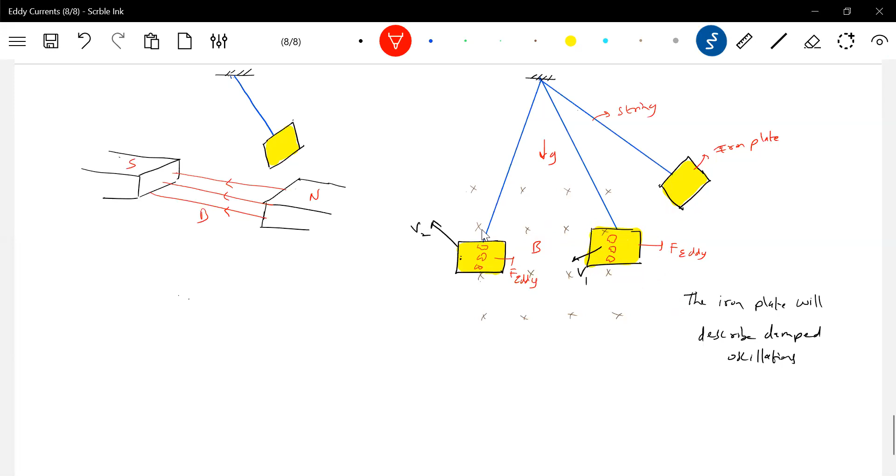Now, provided here, how will the plate swing such that it intersects the lines of force? So can I make it oscillate in this way - the same situation? So let the lines of force be... I think I can't. Oh, B bar will be tangential to the plane of the plate, such that B bar will be tangential to it.

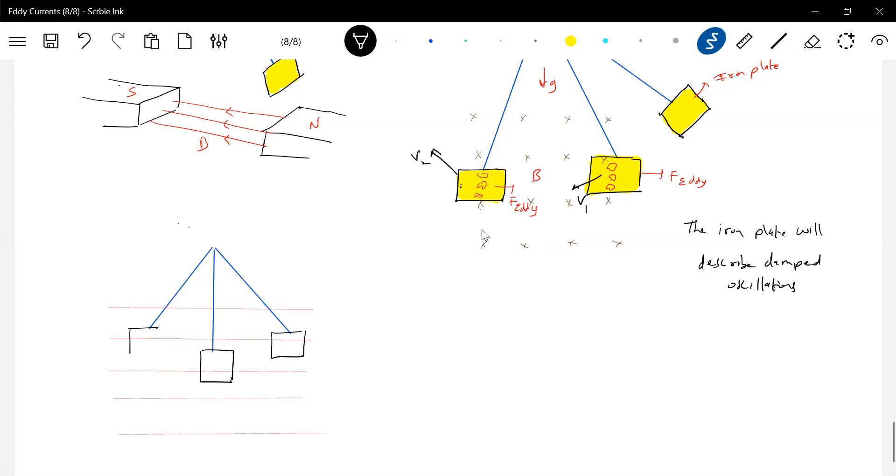Now I'll finish off this diagram a little bit. Now you can see this - there's a plate we have here, it is suspended here. Now B bar is directed tangential to the plate under this strict condition. Here, the plate will intersect.

In this case, the plate - see this - the plate intersects the lines of force, the magnetic lines of force. Here, what about here? The B is tangential to the plate, and here are the magnetic lines of force.

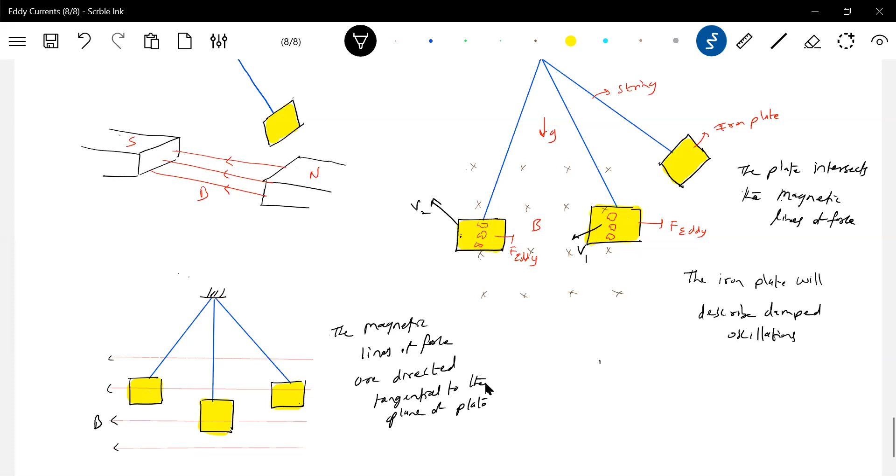Second situation: I can release it in such a way that the plate can swing so that the B bar... anybody here? Eddy currents, undamped oscillations, nothing, no eddy currents here. Flux linking itself is zero, no? Flux linking plate is zero.

Matters a lot, how it swings matters a lot. Flux linking the plate is zero, so no eddy currents here, that one. No eddy current means definitely the plate describes undamped oscillations.

If you slice it to some extent, you can minimize the damping effect. So how you slice it will determine the nature of the damping effect.

I think the way this topic can be asked, they can pull you to any extent. You should be very careful. If you check the advanced mains papers, all theoretical questions only will come. You should be extra alert about eddy currents. It's very important — I'm telling you this, check the advanced mains papers, you have plenty of questions on this very small, tiny topic. So if you revise such topics before exams, and if anything comes, you're on the safer side.

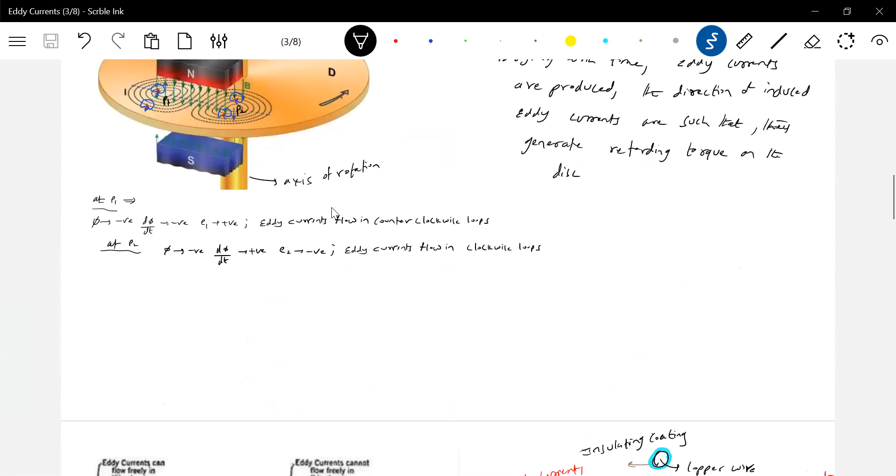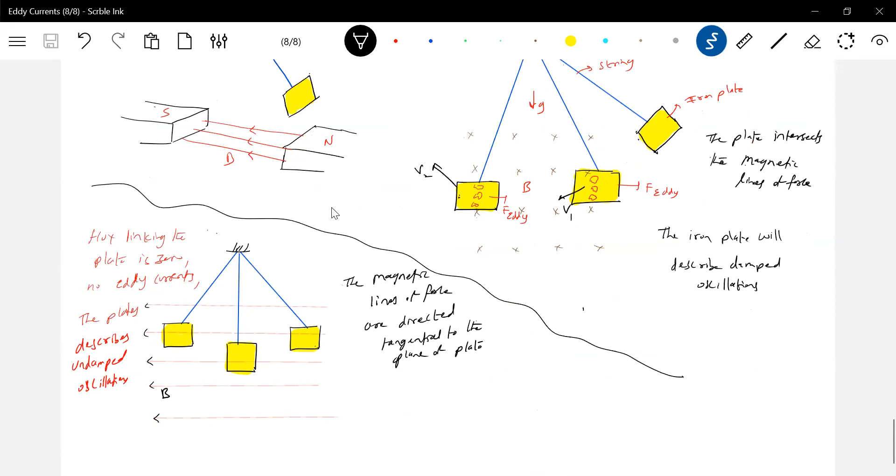Even for a rotating disk also, not only this, even for a rotating disk, it can come in anywhere. One more, last 10 minutes, then we'll finish off. I'll give one more example.

This is not correct. There's a cylinder which is rotating about this axis. Then I will generate an external magnetic field here. It's given an angular velocity and the cylinder is released. We have an external magnetic field switched on, and that magnetic field, let it be time varying.

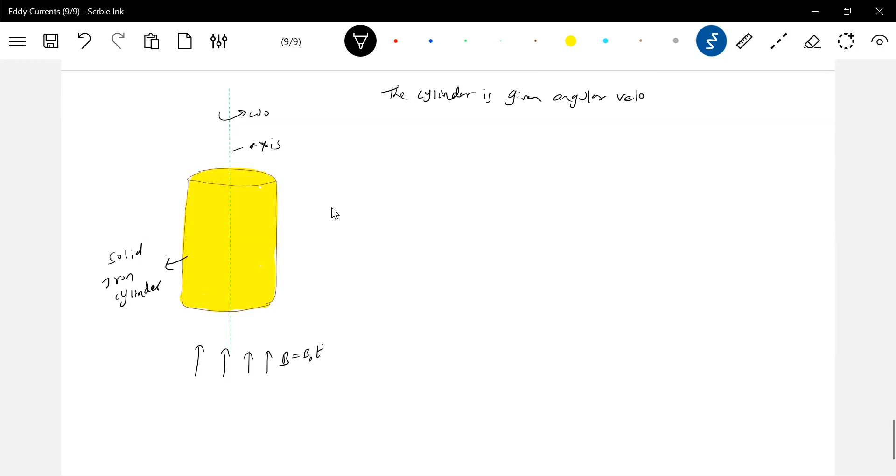Will anything happen to the cylinder, no? This is a metal cylinder, a solid iron cylinder. So the cylinder is given angular velocity omega naught about its axis.

And then a time varying magnetic field is switched on. Describe the motion of the cylinder.

Will anything happen to the cylinder? It will undergo a retarding torque due to eddy currents. So what is the answer we can write?

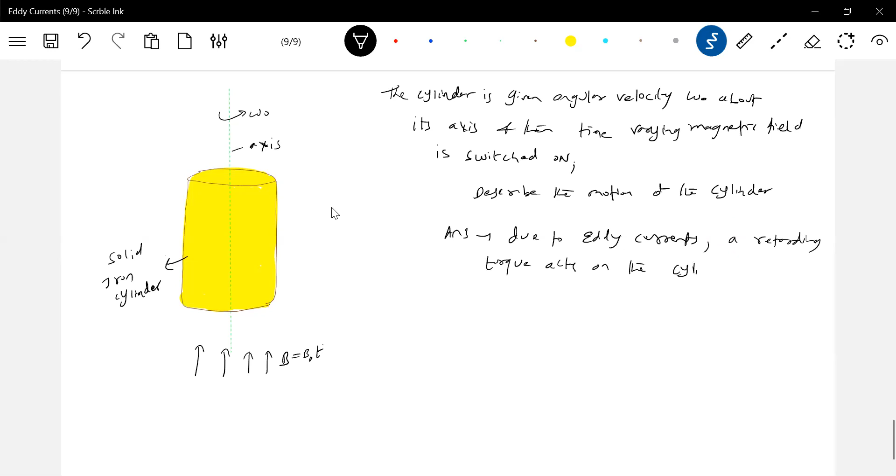Due to eddy currents, a retarding torque acts on the cylinder, and hence the cylinder rotates with decreasing speed, and finally comes to rest. Afterwards, again, we don't know, so we'll write decreasing speed. So the retarding torque will be in this direction — this is the torque due to eddy currents.

Very simple — someone may bring in that the eddy current varies with angular velocity or something like that. Now go back to the kinematics of circular motion and work it out. Don't get scared, anything here?

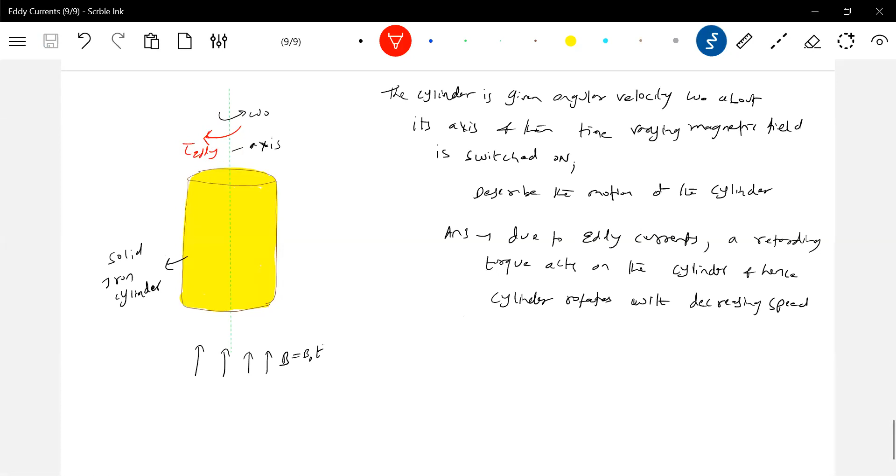Okay kids, we had a discussion about eddy currents. I think this is the first topic where I didn't do any numerical. Hope you remember, in physics overall I usually work out many numericals for any topic — I think this is the only topic where we don't have numericals.

So that's why I thought, let's give a lot of examples, since they can ask in many ways. Even some of the questions I may find difficult — what will happen? You have to understand how eddy currents arise and how they impact the motion. I think this will be a very challenging one, so I gave a good number of examples, almost 7 examples. Anything related to this can appear in any exam, so think about this more — you'll be on the safer side, but it's a very important topic.